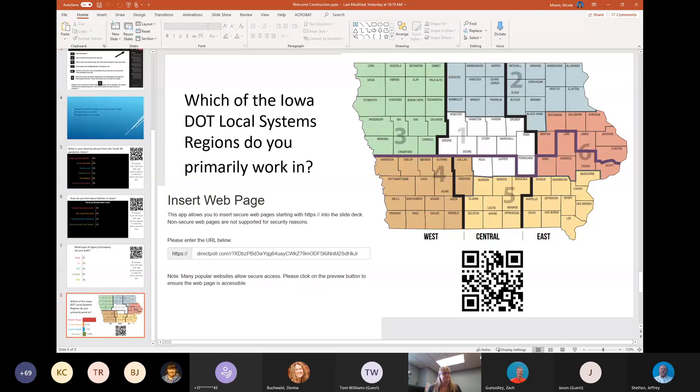Thanks, Nicole. Can everybody see me and hear me fine? Yes, we can. All right, thank you.

Thanks everyone for being here this morning. I hope this is the only spring meeting we have to do it this way. We love the donuts in person, of course, but hopefully this is the last one we have to do this way. I do want to point out, especially for you Kent, yesterday you with the Eastern region mentioned Hawkeye, and as you can see I wanted to stay neutral, so none of my clothes have any Iowa State stuff on it. Didn't want to pick sides. DOT, staying neutral and all that.

No picking sides here today. But I do want to say he made me put on a nice shirt. He looked so good yesterday that I wanted to put on a nice shirt. And of course with COVID, all your nice shirts are wrinkled in the closet, not worn. So I got out the iron, and halfway through it's like, why am I ironing the back? So it doesn't matter. I heard Nicole laugh, so maybe one person laughed at that. That's the other beauty of virtual meetings, I can just assume everybody laughed at that terrible joke.

Exactly. So, all right, I'm going to share my screen here, and then I'm going to try to take my video off to help with bandwidth. As Nicole said, this is the construction and contract administration presentation.

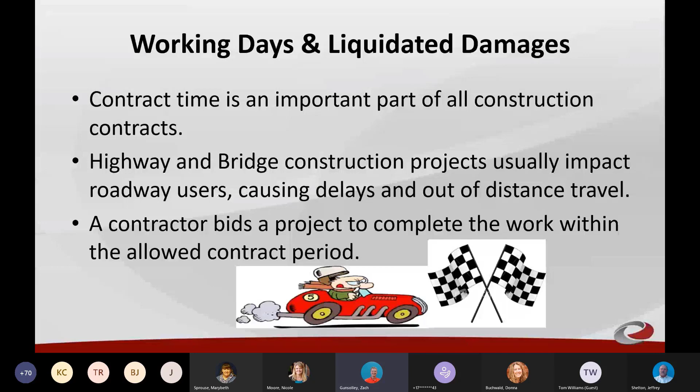Contract time can be established using various methods or a combination of methods: working days, calendar days, closure days, and completion dates. Working days are the most common method of contract time, covered in Standard Spec 110802 and IM 6.000 Attachment D, Section 231 in more detail. It is important that working days are administered consistently statewide because it impacts bidding practices, inspection time and costs, roadway users, and lessens disagreements with contractors. So we're going to go through a refresher on administering working days.

Charging of working days is based upon a controlling item or operation of work. The controlling item of work is work that is or could be in progress at any given period of time and would have the greatest influence on the duration of the contract. At any given time, any task which has the greatest impact on completing the project on time will be considered the controlling item of work.

I like to look at it like the bottleneck. What is the bottleneck on trying to get the work done? Work must be able to be performed on the controlling item of work before a working day or a partial working day can be charged.

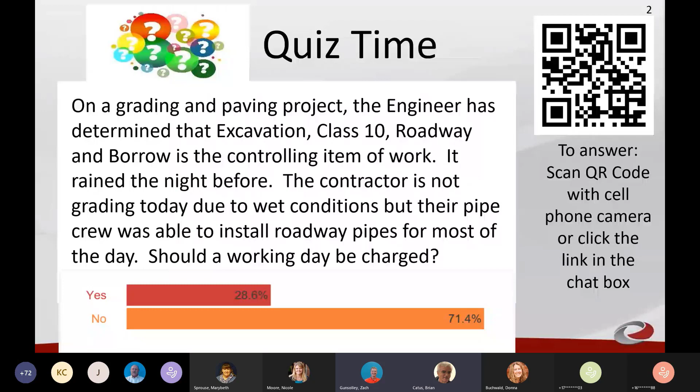Okay, I think we're flattening out. It's normalizing. About three quarters say no, and about a quarter or better say yes. The answer is no. So good job, everybody. Even though a part of the contractor's crew was able to be productive the majority of the day, work has to occur on the controlling item of work in order to charge a working day.

Who determines the controlling item of work? The engineer. A contractor may dispute the engineer's decision, but it is still the engineer's decision, not the contractor.

Okay, another quiz. A contractor disagrees with a working day that was charged. How long do they have to dispute the time charged?

Okay, well above 90% for 10 calendar days. One week is getting 6% on my screen, and for all eternity is down to 3%. I'd be voting that one too, not gonna lie, just to have fun.

All right, 90%, it's normalized here. We're going to move on. The answer, 10 calendar days. Good job. The calendar day count begins being counted when the contractor receives the working day report. That's uploaded in Doc Express. The requirement is noted in the standard spec 110802, section H.

This requirement needs to be clearly communicated during the pre-con meeting. You should not entertain time disputes submitted at the end of the project. This is important, everybody, because we have seen at the regional level, it's not quite widespread, but enough to mention that timely submissions aren't always done with the working day reports, and that does leave the door open for problems at the end of the project, and we have seen that here and there throughout the region. So that helps keep those disputes minimized at the end of the project.

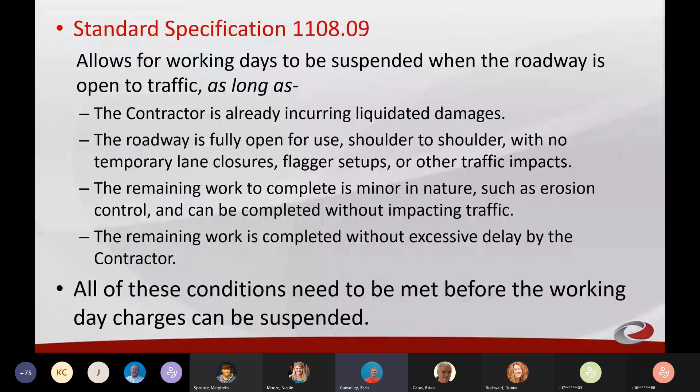I've been guilty of not doing this in the past myself, so this is a good refresher for everybody. The time suspension should not be applied when there are several or larger items of work to complete. This specification is typically applied for punch list work, although the contractor is supposed to be out of working days for the specification to apply. It is up to the engineer's discretion whether the specification is applied or not - it is not the contractor's choice or right. They sign that right away when they bid the project.

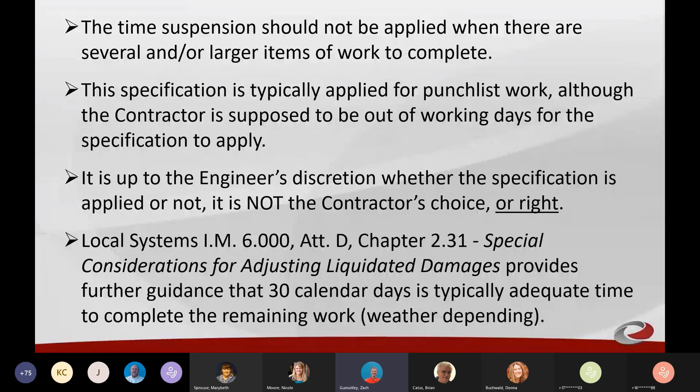That's in the specifications. Local Systems IM 6, Attachment D, 231, Special Considerations for Adjusting Liquidated Damages, is where you can find more details on this, and further guidance that 30 calendar days is typically adequate to complete remaining work.

LDs - when a contractor exceeds the allowed number of working days or does not finish work by the completion date, liquidated damages are to be assessed. For completion date projects, calendar days will be tracked every calendar day past the completion date using the weekly report of working days, Form 830-238.

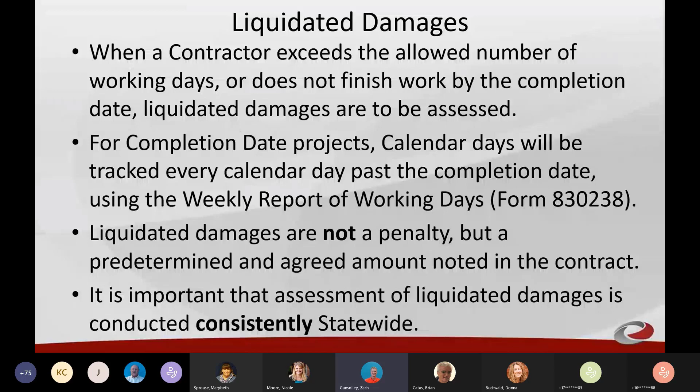Liquidated damages are not a penalty, but a predetermined and agreed amount noted in the contract. They bid knowing that is the amount, and so that's why it's to be assessed appropriately. It is important that the assessment of liquidated damages is conducted consistently statewide. Liquidated damages are a term of the contract and need to be treated as such.

LDs should not be waived without just and documentable cause. FHWA has provided the Iowa DOT with guidance on how to document any waivers to liquidated damages. The Iowa DOT is committed to following this guidance on federal aid, SWAP, and FM projects to help maintain statewide consistency. It eliminates the 'well, so-and-so county or so-and-so city allowed me to do this or that' - that's what we're getting at here.

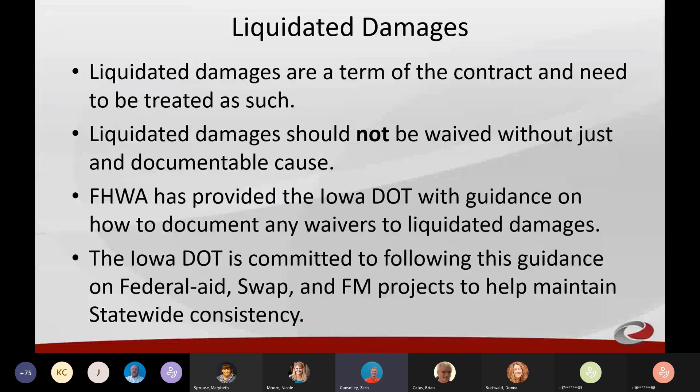All changes to the contract time must be documented by a change order. If liquidated damages are being waived based upon standard spec 1108.09, the reason for the waiver must be documented by a change order. If LDs will be eliminated by adding more working days, the change order needs to provide justification for those added days. If LDs are being waived because the contracting authority does not believe they were damaged, this must be documented by a change order that demonstrates why there was no damage, supported by the engineer's analysis of the time and cost impact.

The Local Systems Bureau is here to help address liquidated damage questions. If you have questions on this, the best person to reach out to in the Western region is Field Technician Jeff Shelton. He reviews all draft change orders, including ones with liquidated damages. He'd be your first point of contact in the Western region, and I'm sure the field technicians in the other two regions are the appropriate persons to contact for the same.

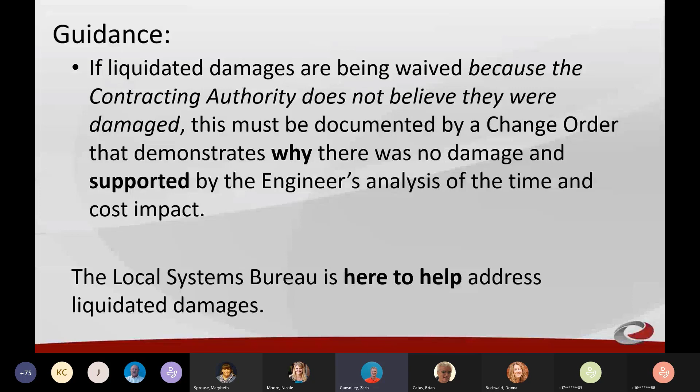Fieldwork acceptance in Form 435, Federal Aid, SWAP, and Farm to Market TSF projects. Notify by email the local systems field engineer approximately 2 weeks prior to the contractor completing work to request a final field review. We know that's not always easy, guys. When you're in the heat of the moment, one of the last things you're thinking about when wrapping up a project is notifying us by email that we're getting close.

We just have so many projects at a field level. Jeff, what do we have? About 180 projects open right now in various stages. 186 this morning. So we don't always know each one like you know them. We do need your help notifying us when you're about ready for final field review. It really helps us plan. With 180 out there, you can imagine we're going several different directions, so that heads up is very much appreciated.

The field review should be scheduled with the project engineer, contractor, local systems field engineer, and other applicable staff. After the field review, email the draft punch list to the field engineer. After the local systems field engineer's concurrence, provide the final punch list to the contractor. After the contractor completes the punch list, email the local systems field engineer with a summary of the corrections taken and include pictures of the final punch list items.

All right, another quiz time. The 435 is used to document acceptance of the field work. When should the 435 be signed by the engineer?

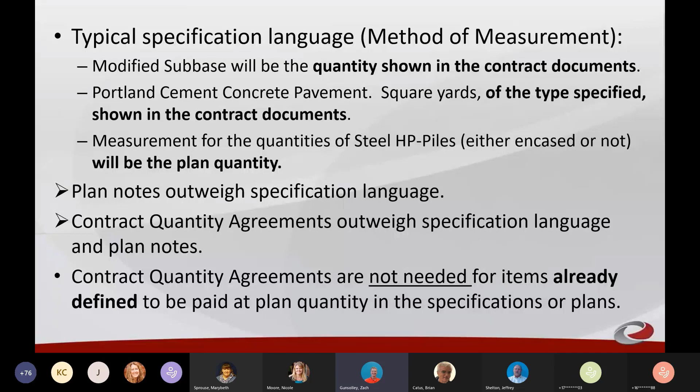Review specifications and plan notes. Plan quantity items should not be changed unless there's an obvious error in the quantity, if there's a bust somewhere. Field conditions modify the plan work, like matching an existing pavement joint, or if there's added or deleted work. If plan quantity items need to change, it must be documented on a change order. Process change orders at the time the change occurs. Please do not wait until the end of the project or include it in the entire contract balancing change order.

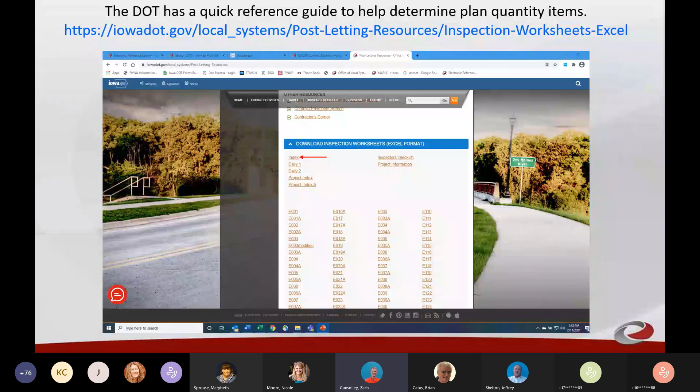If you want to know where this is located, plan quantity items on the local systems website, go to the index button right by the e-forms. And here we are - the blue here is indicating plan quantity. Again, these do not need to be measured. We have some people that do measure those and then want to adjust at the end of the project.

You don't have to. You can save yourself a lot of time, and there's not a lot of value to doing it anyway. We're talking about modified subbase in cubic yards, granular subbase in square yards. These kinds of things do not need to be measured down to the gnat's rear. It is by plan quantity, whatever is in the quantities in the plans is to be paid.

Quiz time. What does the inspector need to document on their quantity sheet for a plan quantity item? A lot of choices on this one.

Calculated quantity of field work performed, 3%. Dates and locations of work, 20%. Answers 3 and 5, almost 18%. And 4 and 5, about half of you are saying 4 and 5. And about 7% say 3 and 5. I think it's normalizing here, so we're going to move ahead.

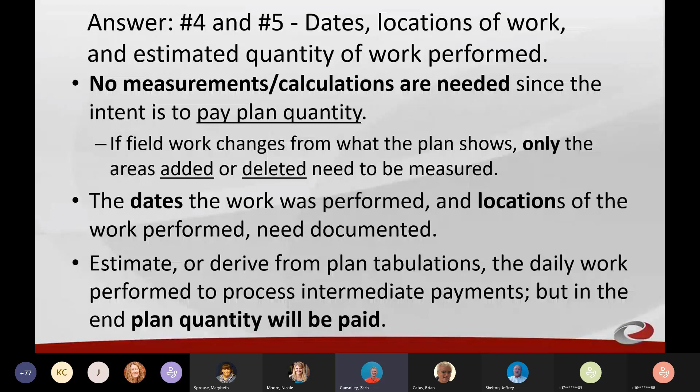Answer, 4 and 5: dates, locations of work, and estimated quantity of work performed. No measurements or calculations are needed since the intent is to pay plan quantity. If the field work changes from what the plan shows, only the areas added or deleted need to be measured. The dates the work was performed and the locations of the work performed need to be documented. Estimate or derive from plan tabs the daily work performed to process intermediate payments, but in the end, plan quantity will ultimately be what is paid.

Okay, DOT process changes. Over the last couple of years, changes have occurred in the processing of contractor pay system vouchers, so 309s, your farm to market vouchers, signing change orders, and processing final paperwork.

Another quiz here. How should contractor pay system vouchers, like your farm to market vouchers, be submitted for payment? Mail to Finance Bureau, upload to Doc Express and DOT will process, upload to Doc Express and email to dot.localsystems, upload to Doc Express and email.

DOT contractor pay. At some point in the past, a lot of these have been the way it's changed a lot. Over 90% of you are picking upload to Doc Express and email, 4% for upload to Doc Express and DOT contractor pay. We'll move on to the answer, and it is, yes, you're right: upload to Doc Express and email to DOT Local Systems, Iowa DOT US.

As of September 22nd of last year, all intermediate and semifinal vouchers for contractor pay system projects are to be uploaded in Doc Express and submitted by email to this web address. The submittal of the voucher will be handled by the administering bureau. New blank vouchers and payment receipts are uploaded to Doc Express, estimates and vouchers drawer by Local Systems Bureau.

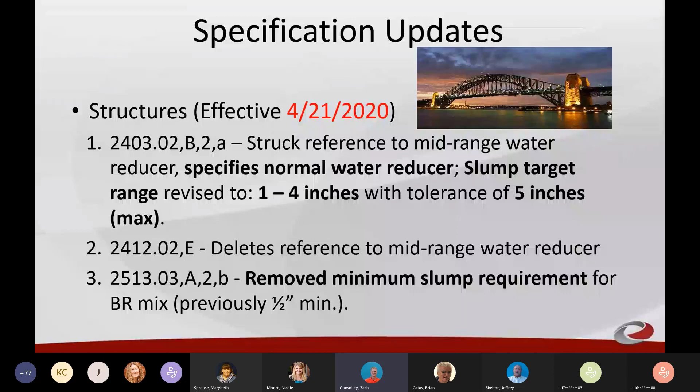Another change on 02E deletes reference to mid-range water reducer. Then 2513.03,A,2,b, remove minimum slump requirement for BR mix, previously 1/2 inch. 251303F1 updated specification reference for finishing requirements.

And then IM 445, precast concrete. Precast products can't be shipped until the products are a minimum 3 days old and attain 28-day strength.

241203C, placing concrete. Added the word 'forecast' to the following statement: Do not place concrete if forecast theoretical rate of evaporation for the day exceeds 0.2 pounds per square foot per hour. Added a requirement to calculate the theoretical evaporation rate in accordance with methods in Materials IM 382, at a maximum interval of every 3 hours during placement. If the rate exceeds 0.2 pounds per square foot per hour, cease placement at the next location acceptable to the engineer.

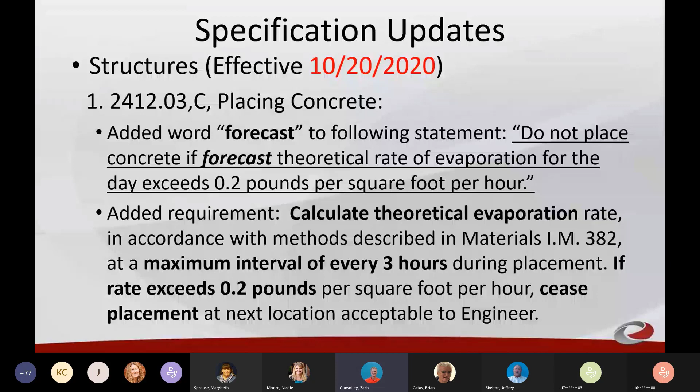Another spec change replaced spec for mid-range water reducer with normal water reducer. Increased price adjustment for uncorrected dips identified during profilogram testing of bridge decks and approaches, $1,600 each, up from $900. Concrete when pumped should use for a target range air content of 7.5% plus or minus 2%.

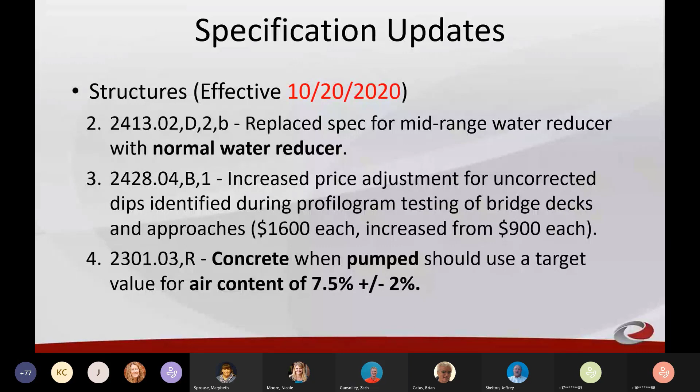More spec changes: revised criteria for installation of steps for manholes and intakes. No steps for structures less than 20 feet deep; steps required for greater than 20 feet deep. Handholes and junction boxes: added specification for HDPE handhole and cover.

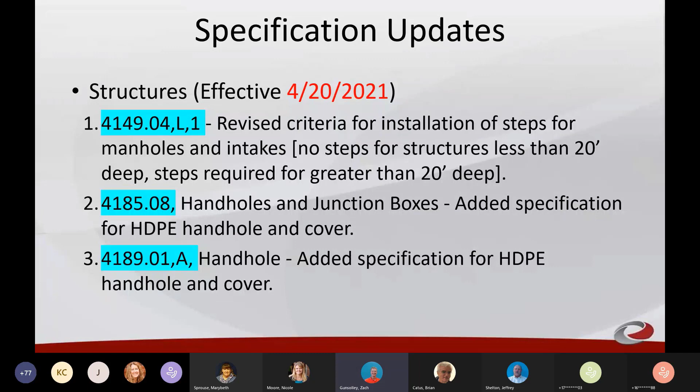418901A, erosion control, standard road plan EC 204, perimeter and slope sediment control devices. I always call them SOCs.

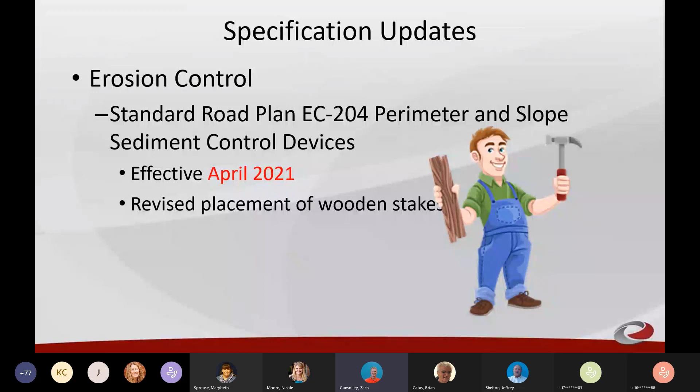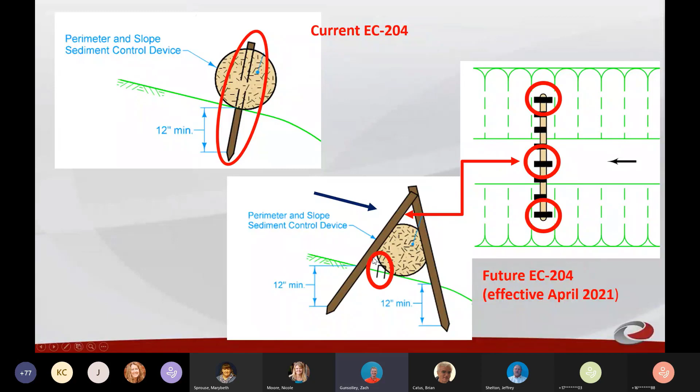Effective this next letting, revised placement of wooden stakes. The current configuration is shown here, and effective this next letting, these are going to be required at these locations. I suspect it's because they were blowing out, so they want more reinforcement for those stakes, and then we have a staple right here too.

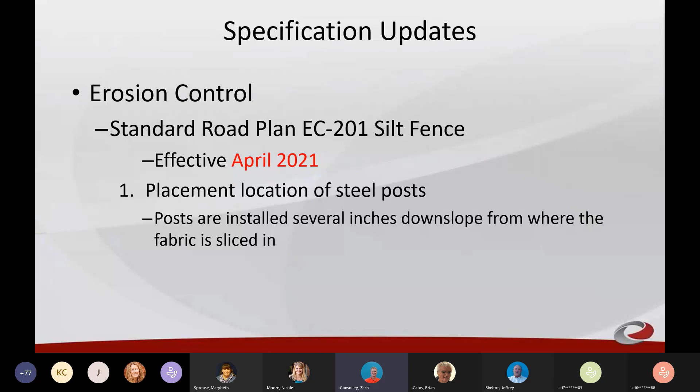Placement and location of steel posts. For silt fence, posts are installed several inches downslope where the fabric is sliced in. The old way was the silt fence right next to the post. The new way, it's going to be set back like this, with a little bit of slack in that silt fence.

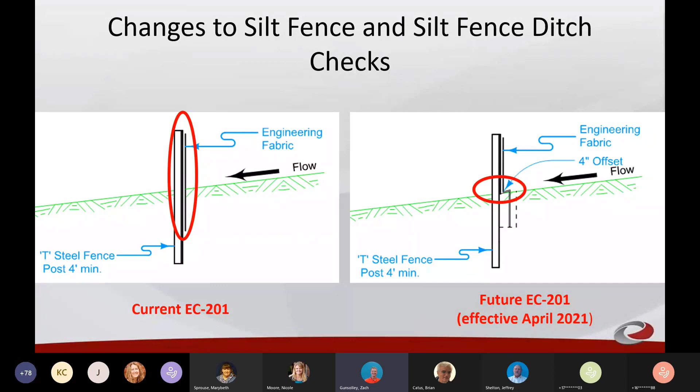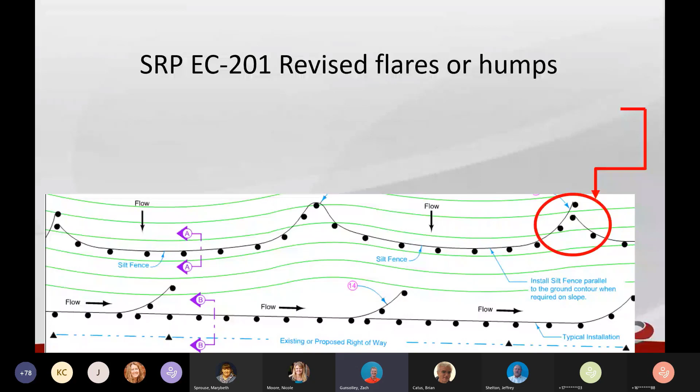Place silt fence continuously up to a maximum 200 feet in flare, shown in this diagram as these humps, just to catch it so it doesn't run laterally along the silt fence on your slope and make cuts.

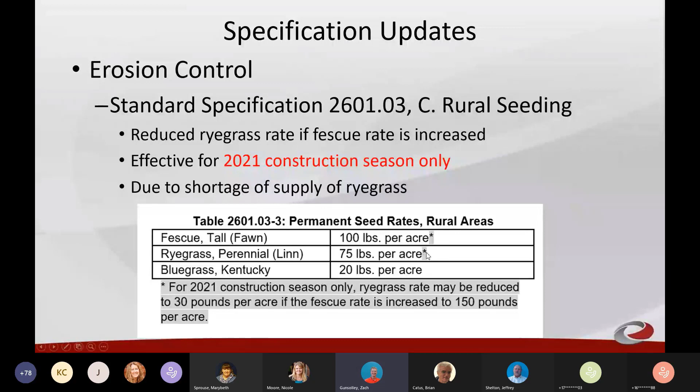Seeding: reduced ryegrass rate if fescue rate is increased, effective for the 2021 construction season only, due to a shortage supply of ryegrass. We still have the rates right here, but the asterisk here is new, and down here it talks about that.

PCC pavement, standard spec 230105K, pavement for cold weather protection, effective last October, increased the rate of pay from $1 to $2 per square yard. I only had to make the mistake once of not speccing that cold weather protection will not be paid for in my plans, and I had to pay to put a coat on, and now it's going to be twice as expensive for that coat.

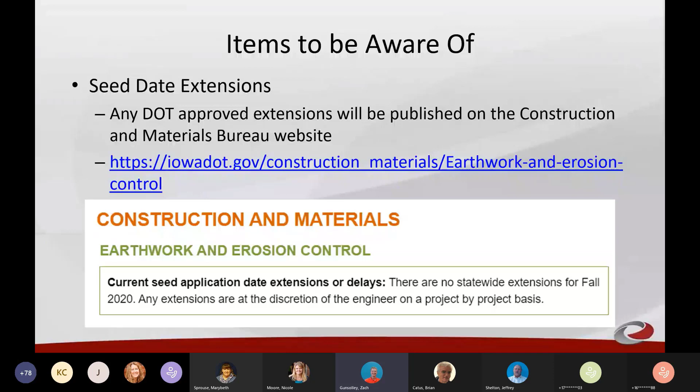Items to be aware of: seed date extensions. Any DOT-approved extensions will be published on the Construction and Materials Bureau website. Here's a link. General items of interest: concrete barrier railing issues.

We've noticed projects identified multiple issues last year. These issues should be closely monitored for your bridge projects.

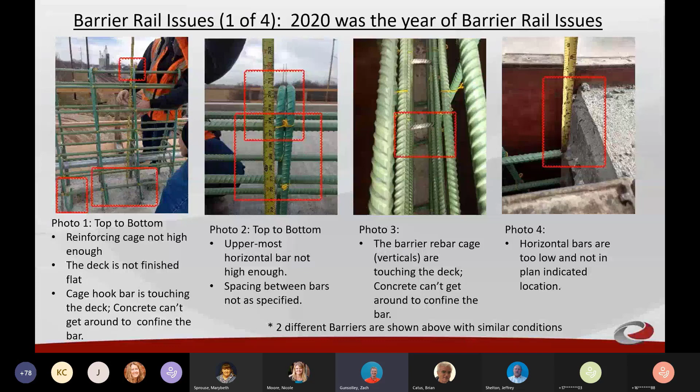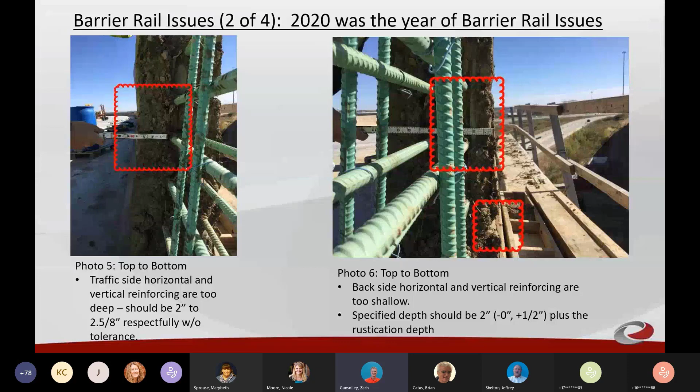And then here's one, the back side of the horizontal and vertical are too shallow. And there's the depth that's required for that.

What it does is your barrier will not be as strong if the reinforcing is not placed where it's supposed to be. Number two, it has risk of being exposed early and starting rust, which will hurt the durability and not protect the reinforcing.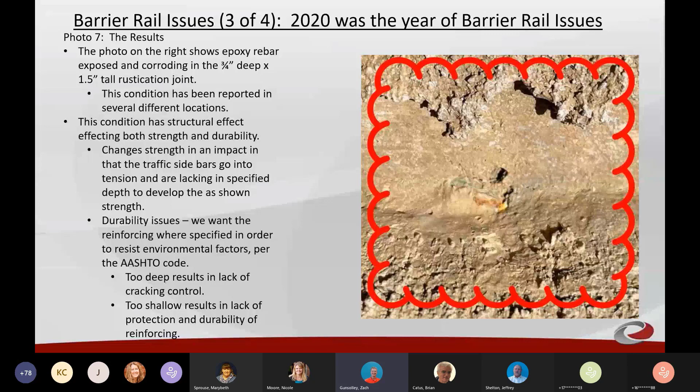I'm not going to read all this, but it'll be included in the PowerPoint on our website, showing examples of that. If you're wondering, I'll just leave you with this: you got one chance to do it right, and once it's covered and done, it's hard to correct.

So if you see something, say something, and if it's a slip form, dry run it first.

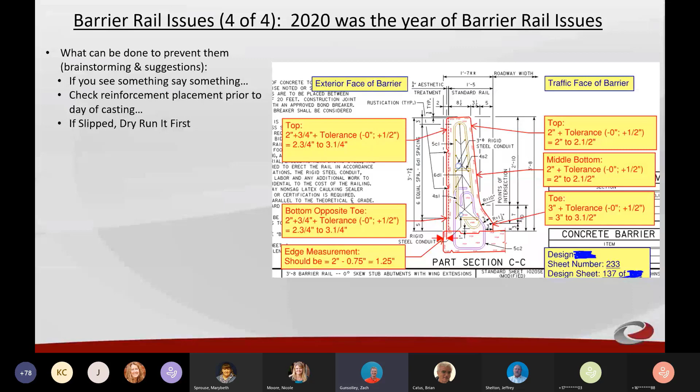General items of interest, we've got a few minutes left here. Line dragons can be an option for difficult bridge deck pours, as can transparent stay-in-place bridge forms. I think Nicole was saying this is catching on in a lot of other states, and Iowa, for some reason, is a little bit behind on this one rather than being front on some things. It seems to be catching on elsewhere and just now being introduced in Iowa.

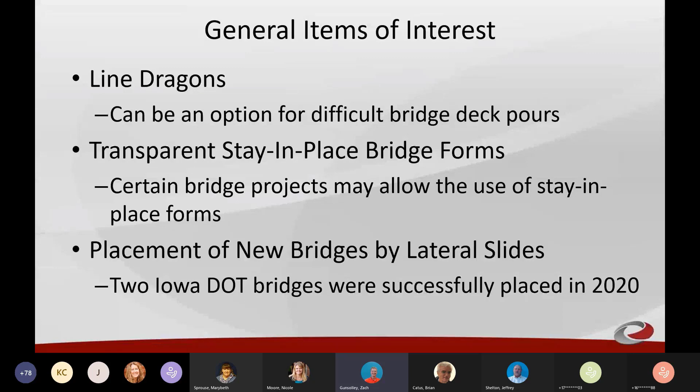Placement of 2 new bridges by lateral slides - 2 Iowa DOT bridges were successfully placed in 2020. So here's the line dragon.

I'm not going to read all this, but the line dragon, maybe some of you have seen this - the red guy in the photo, that's a placer in the left photo. Then here we've got 2 of them, the placer and the puller on the right here. So they're working in tandem.

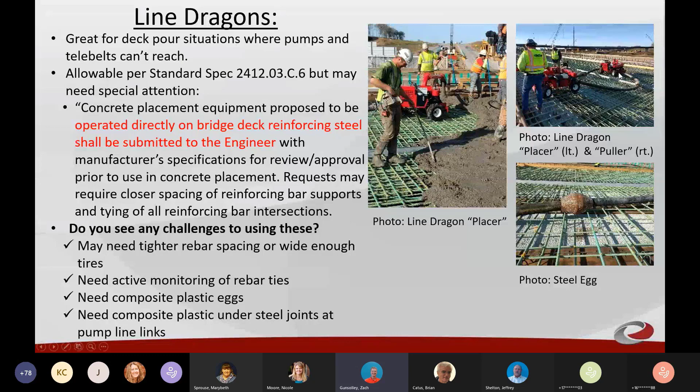Here's the transparent stay-in-place forms. The advantages of this, I'll just read them briefly: for bridges spanning over a railroad, it might be advantageous to use over non-navigable water, on tub girder bridges, and on bridges requiring top-down construction, like if there's utilities or other obstructions down below. Successfully used in 2020 on some bridges.

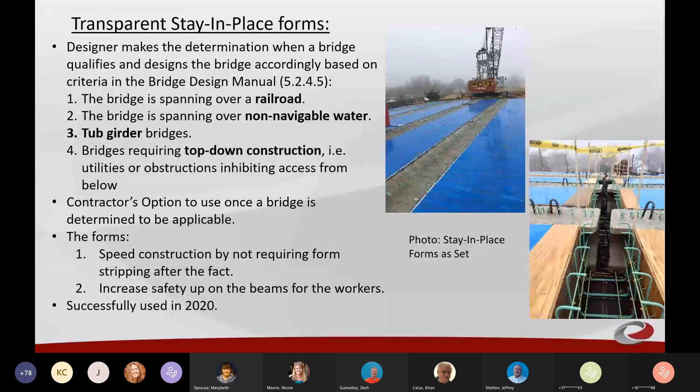Okay, I bored you to death. That's it. I did have a text during the presentation - where's my donut? Here you go. Here's your donut. Virtual donuts for everybody.

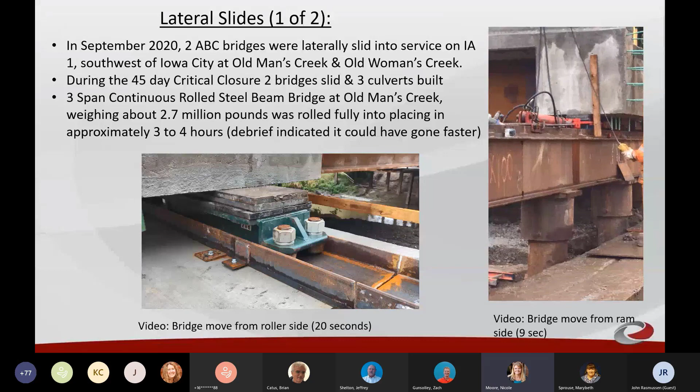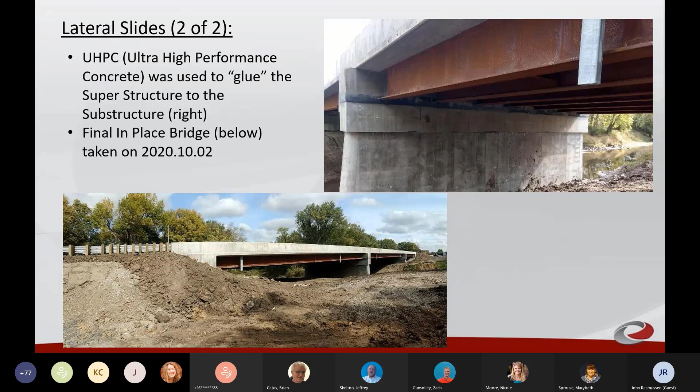As far as materials requirements for local public agencies, the project engineer shall follow all materials inspection requirements per DOT specifications, particularly materials IM 204 and all of its appendices. Swap projects fall under category 4 in materials IM 103, so that's something to also pay special attention to, and I'll get into more of this stuff in detail here in a little bit.

The DOT will still provide the materials acceptance report, which you might also hear referred to as LIMS—that's what the program's called, I don't remember what that acronym stands for. Agencies can still request sampling and testing on these category 4 type projects like farm to market and federal aid swap.

Certain things the DOT will do, and then certain things the DOT may do. So it's important to pay attention to that language.

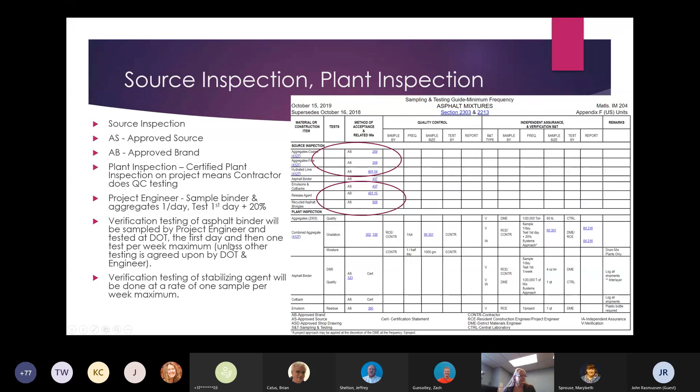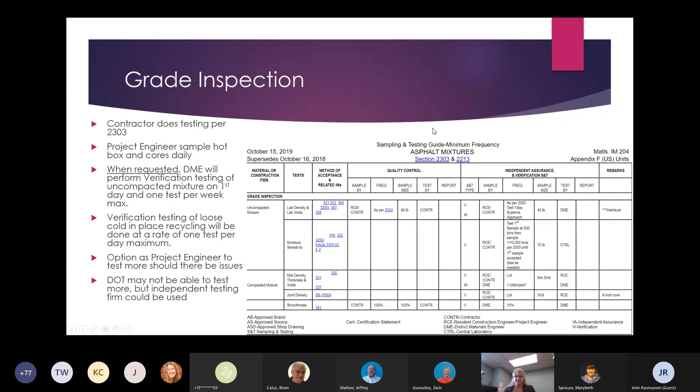The materials IM 103 does say that for category 4 projects, FM and swap only, when requested, the DME will perform limited testing. This includes HMA mix design paper reviews, or test strips if you're doing those. And HMA and PCC verification testing of smoothness, if you've opted in on smoothness, may be done at the rate in IM 204, which I believe says 10%. So just some additional items to keep in mind.

For the PCC paving example, this information comes from materials IM 204 Appendix E. And again, there's the website.

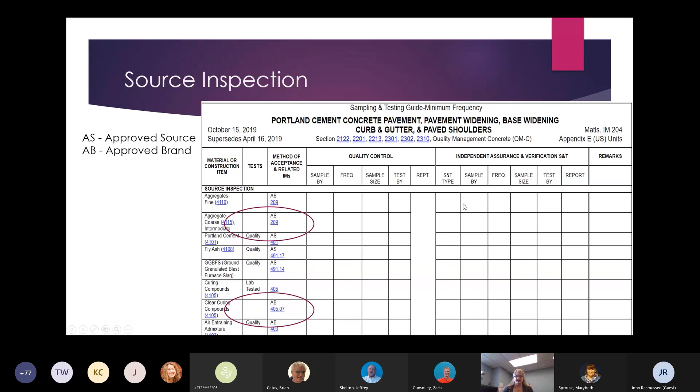So once again, we have this source inspection, and it talks about the approved source or the approved brand. So like curing compounds, you can see that those get tested in a lab, and then you can visit the IM that coordinates with that particular material to see if the brand that your contractor is planning on using shows up as an approved brand already.

So for the source inspection, IM 103 says that for all projects, the DME, when requested, will perform the source inspection tasks in IM 204. That's where you look for that source inspection, like in the previous slide here. And then you can work with the DOT materials staff to make sure that has already been approved.

A lot of these sources are already being inspected by the DOT materials staff, like something like a coarse aggregate. A lot of times they've already inspected that quarry, so you can just ask the materials staff for a copy of the DOT's test results. And if they don't have them, then they would need to do that source inspection.

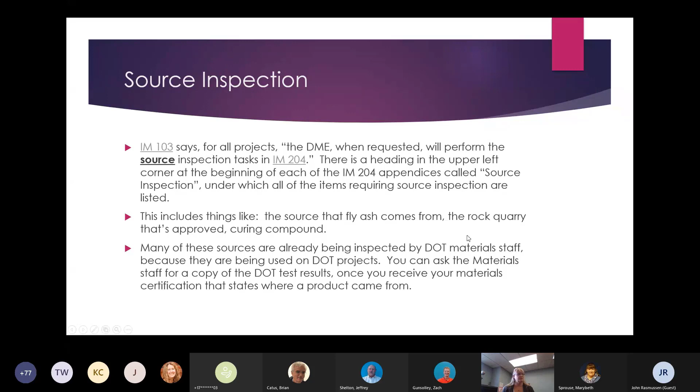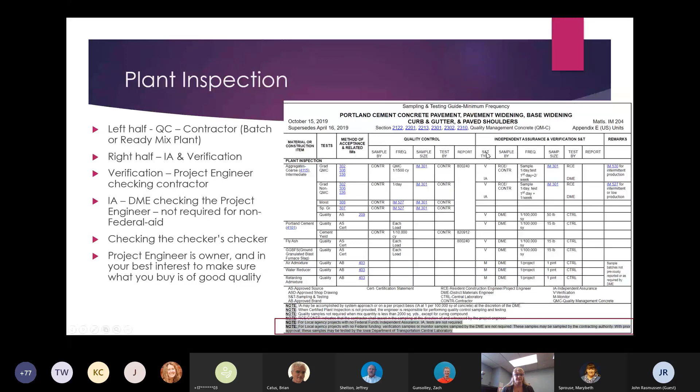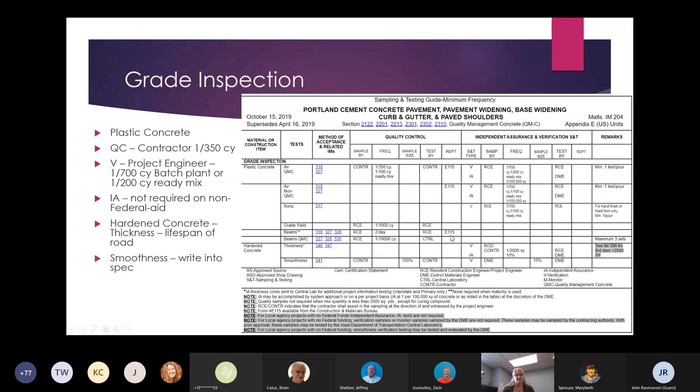So then for grade inspection, the plastic concrete, the QC is the contractor. They're testing 1 per 350 cubic yards, or there's some different requirements if you're QMC. And then verification, the project engineer is testing out there on site. Independent assurance, once again, is not required on non-federal aid, and you'll see that in the notes at the bottom there. And then the hardened concrete, the thickness, that's important for the lifespan of the road, so you can test that. Same thing with smoothness if that is written into your project.

So now we'll get into a bridge example. That's materials IM 204 Appendix H for structural concrete.

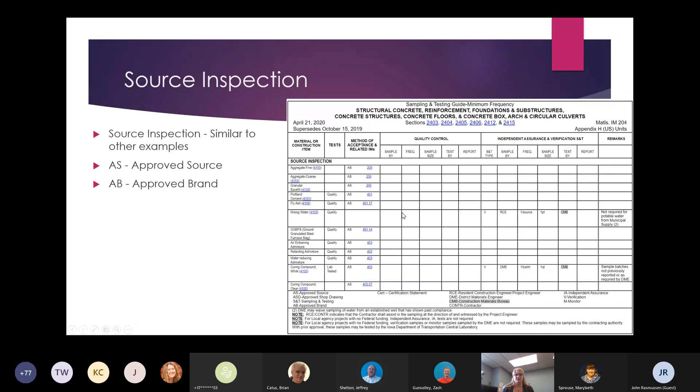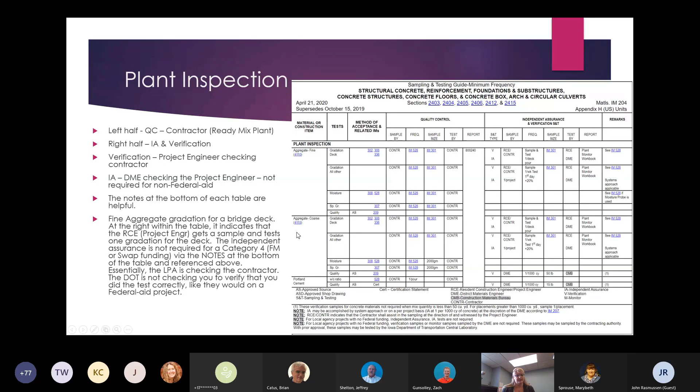That's the part that, like I said, we're not doing on the non-federal aid projects.

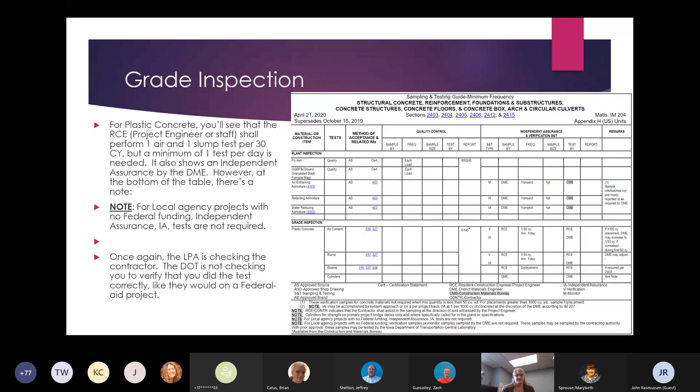For grade inspection at the bridge site, for plastic concrete, the project engineer shall perform 1 air and 1 slump test per 30 cubic yards, but a minimum of 1 test per day is needed. It also shows an independent assurance by the DME, but once again we have that note which says for local agency projects with no federal funding, independent assurance tests are not required. So as the LPA or the LPA's representative acting as project engineer, you're just checking the contractor, and the DOT is not checking you to verify that you did the test correctly like they would on a federal aid project.

One other item that has come up under grade inspection is reinforcing steel. That steel has already come from an approved source, which you've checked in the certifications received from the contractor. Once it gets to the project site, verification says the DME would take a 6-foot sample, but then there's a note: for local agency projects with no federal funding, verification samples or monitor samples sampled by the DME are not required. These samples may be sampled by the contracting authority, and with prior approval may be tested by the Iowa DOT Central Lab. So essentially, you don't need to get that reinforcing steel sample.

However, if you wanted to sample it just to check up on the contractor, or keep them on their toes, you're welcome to ask the contractor to cut a 6-foot piece of steel, and you can take it to the DME. Make sure you read IM 451 first. The contractor can cut that, and you can talk to the DME, and they can send it to the central lab for testing with that prior approval. You could also deliver it to the central lab yourself. You've got some forms to fill out, but you could certainly do that if you were coming to Ames for any reason.

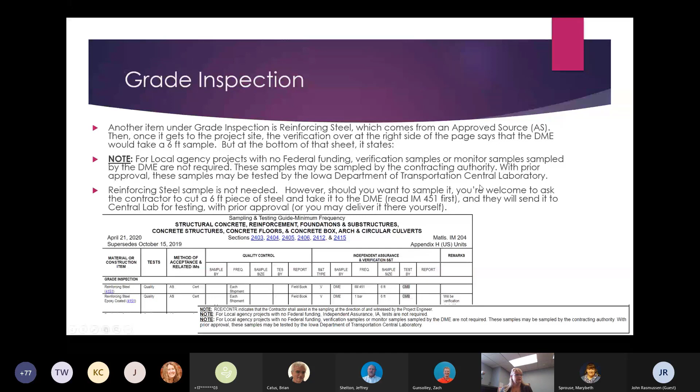So with that, does anyone have any questions?

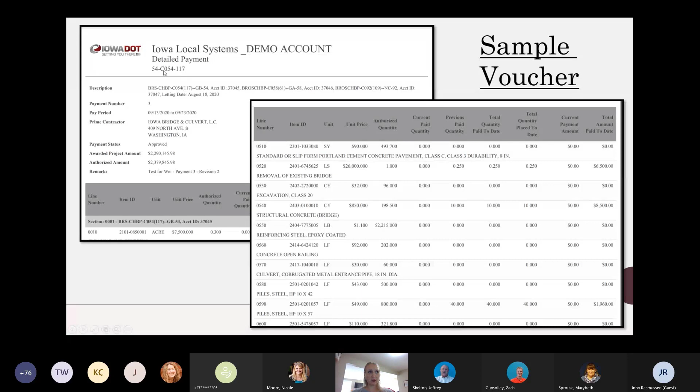So this is just the way a sample voucher looks if you haven't seen one in Appia. Kind of front pages there, and then the end of it shows line items. This one happened to have 3 site times, and a breakout for stockpiles, and then a summary block, which is really, really useful, as opposed to how the 309 vouchers don't really tell you your totals.

So a reminder, a lot of you got this right in the poll question that Zach did: where do I send my vouchers for projects on the farm to market system? Again, this is 309 or farm to market vouchers, not reimbursement projects.

So for all vouchers except the final, send those to dot.localsystems, that email address, for processing. Local systems staff is now processing those rather than finance. Do upload them to DocExpress as well, but make sure you send us that email. We don't necessarily know when they're ready for processing just because they're in DocExpress.

This pertains to whether you're using the Appia voucher or the true farm to market voucher. For final vouchers, continue to just complete those and upload them as normal to DocExpress, and the local systems staff will submit the final packet to finance for closeout.

So using Appia for item postings or quantity entries, remember that it's very, very important to enter all measurements, test results, location information, and any other pertinent information about how a quantity was arrived at in the remarks or location fields within the item posting in Appia. I'll show you an example in just a minute.

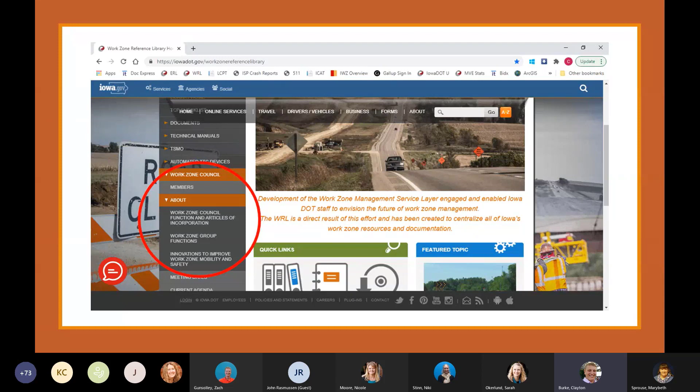So I'll show you the organization chart for the council. I don't expect you to read all the little words, I just wanted to show you how many different groups are plugged into this. Focusing on the field, we have the industry represented by what's called the RISC group, or Roadway Industry Safety Committee, so we get a lot of input from contractors.

Clayton, it looks like you got muted. Yeah, I hit the mute button. Okay, my sub-screen disappeared on me.

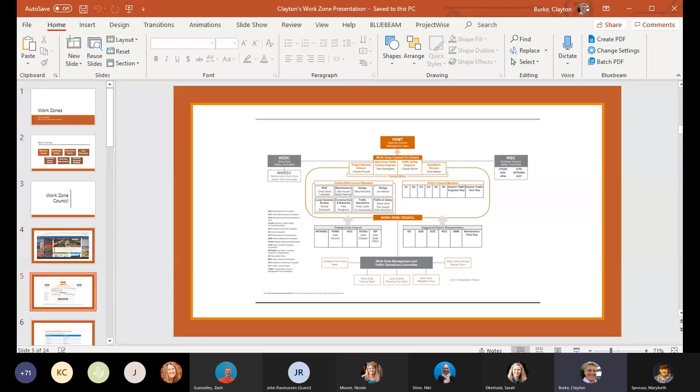So we're getting a lot of input from contractors, and then an important input for the field side is the districts. But we also have local systems represented by Donna. So if you ever have any ideas, make sure they make their way up to Donna or whoever continues to represent local systems in the upcoming meeting.

These are the meeting dates for this year. We just had our January meeting, but the April meeting is coming up pretty quickly. We do want any agenda topics two weeks before the meeting so everyone has time to read about and prepare for the different discussion topics. So keep that in mind if you're submitting one of your ideas.

Specification updates: there was a fairly large traffic control related update in October. It went through section 2528, our traffic control section, 2518, the safety closures, and 1107, our general safety and public safety specification.

I'm not going to go through all the different changes, but if you have a project using Iowa DOT standards with 2528, check it out and look for the gray highlighted language. The general purpose of the changes was to remove some outdated language and some contradicting clauses between 2528 and 1107.